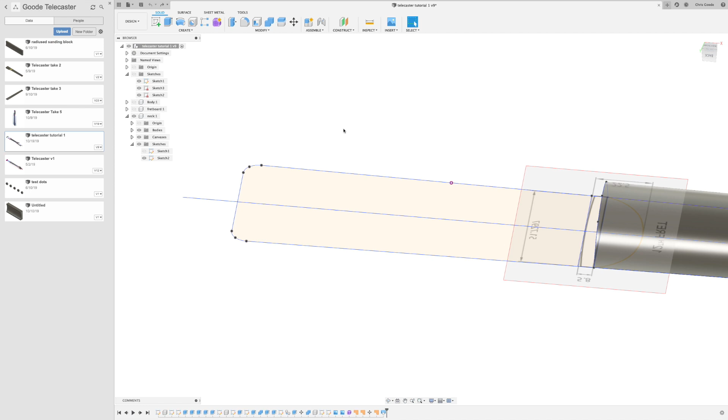Hi, Chris Goode here, and we've been working on this neck for a little while. Last time we lofted between these two neck profile samples that we grabbed a canvas of off a really cool website that makes custom necks. I really like the shape of this. If you want to try buying a neck from them, let me know how it goes, because if they look and feel like the ones I made from these profiles, I kind of like the way this neck plays. Really slim up in here, not really chunky, although sometimes that's desirable. It's just a slim profile neck that I like.

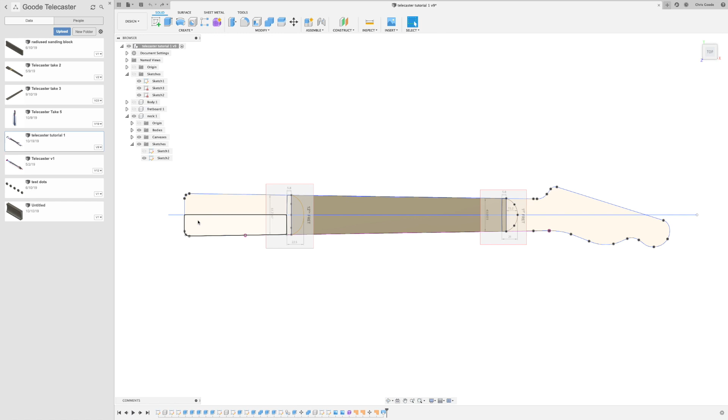Anywho, now we're going to work on the transition between this part of the neck and the heel, which is this part that we're going to extrude. In order to do that, we're going to have to edit this old sketch that we've got and get this in the right orientation. We're going to edit this part, so edit sketch. Great.

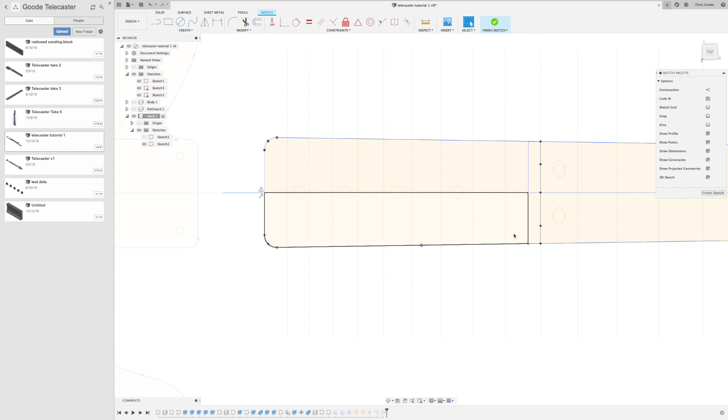Let me just show you where the frets are. The transition from that part I just showed you to the heel, which is where it bolts onto the body, is somewhere in between these two frets, the 15th and the 16th fret. So it's somewhere in here. So we were at 12. I'm going to go 13, 14, 15. Maybe where this dot is. There's nothing wrong with that. I think that would be fine.

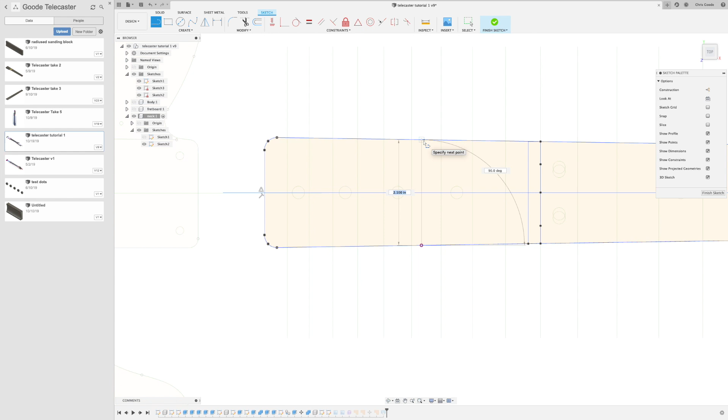So I'm going to grab a line and grab that dot, make it a 90-degree angle all the way up to this point, and then I'm done. That's it, we're done drawing the line. We can finish the sketch, then hide that other one, and make sure that we're in the neck component. So make sure you activate that component.

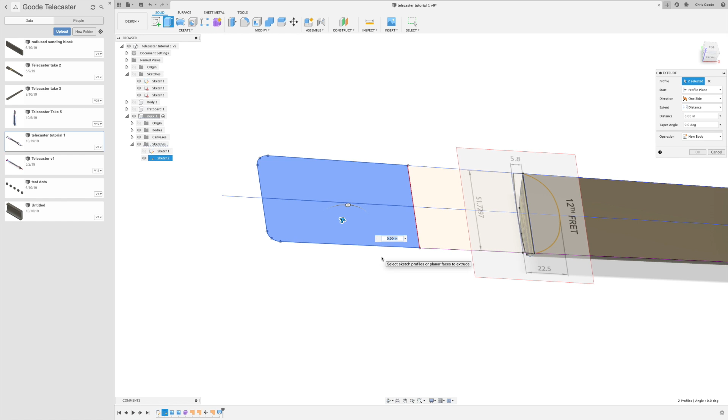And we're going to extrude this down 0.75 inches. So up is positive, and we want to go negative 0.75. There it is. And there we go.

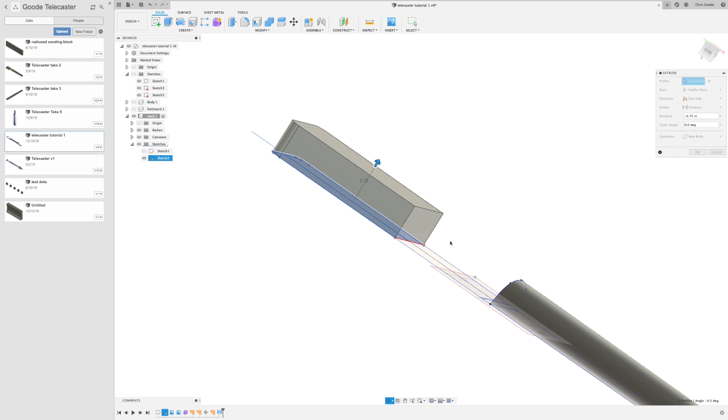I like it. So now the trick is that we're going to now work on the back side of it. Come here there. Okay, let's finish that body. That's good. Now we have one body here, an extra body.

Great, we're going to make a sketch that's on top of this one, so we're going to create a new sketch. And we're just going to make a little line coming out this way, sort of a little blunted triangle shape. We're going to do that by drawing a spline from here, connect it to the midline, and then connect it here.

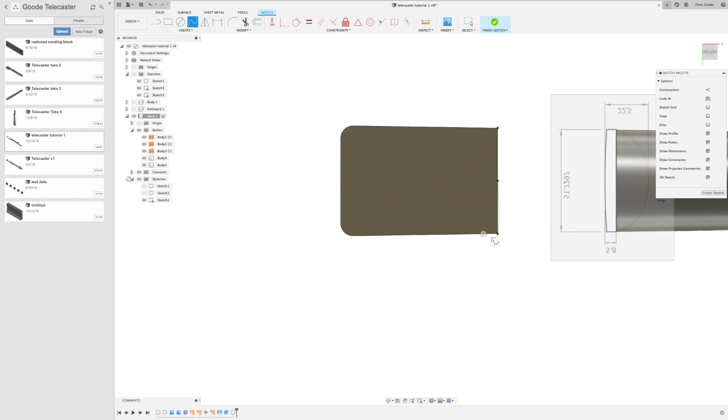And now's a good time for me to share with you where I'm getting this idea. Brad Anderson Jr., who I've mentioned before, has made a wonderful plugin for making fretboards and necks themselves in Fusion 360, is a member of Decatur Makers, and has made some beautiful guitars in the space. This is all cribbed from his video series on YouTube, and I'm happy to link to them in the notes below. I do like one or two things slightly differently, but for the most part, this is the method he's used to loft successfully.

Lofting, like I said earlier, is really tricky, but this is kind of a foolproof way that lets you loft when you do it right. And I'm going to try not to screw this up.

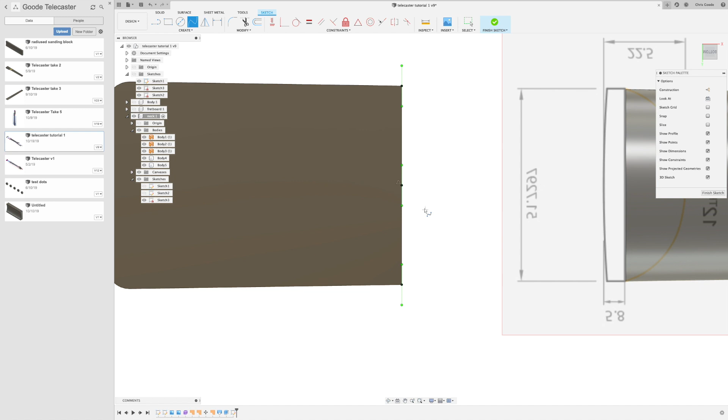When you made this spline, you'll see that you generated a couple of coincidents here. So there's this triangle, which means you're halfway, and then there's these coincidence with these other dots. These are okay for now, but the triangle I'm going to have to get rid of because I want to be able to move this point.

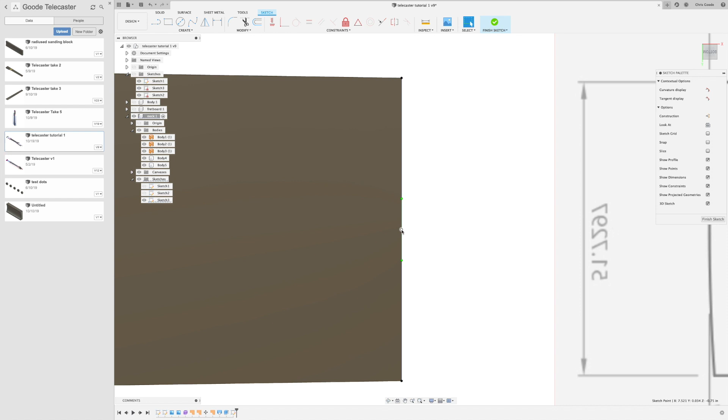So we're going to click on that, move copy, and we're just going to shift this out here to where? I don't know, let's see. Let's reveal where the frets are. I'm going to put it like kind of at the top of this circle right here. I don't know, try it out and see if it works for you. I think that's fine.

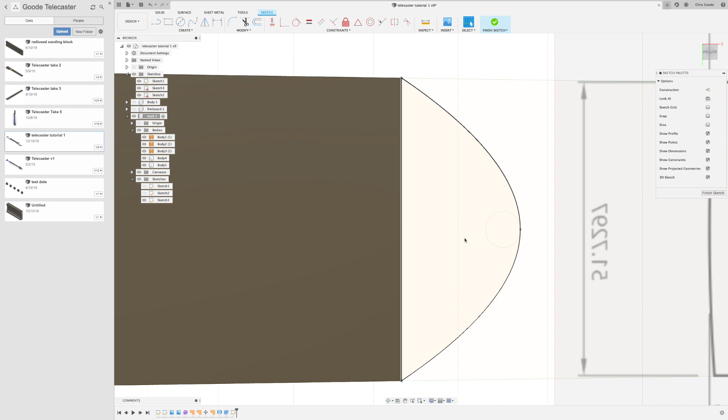All right, and now we want to make sure that this curve is coming straight out from this line, so we're going to make this align with that line. So now we get a coincident of the handle with the neckline, and that's fine. That's good, that's what we want.

I'm going to do the same thing to the other side. I grab that handle and stick it over here, so it's coincident with the line as well. And maybe we'll highlight this handle and make it equal in length to this handle. There we go. Now they're the same length and it looks nice.

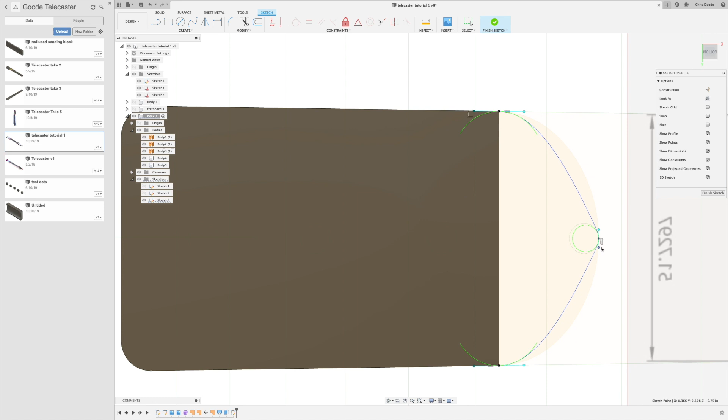This handle actually is screwed up, see? I'm going to make this one vertical first, so it's constrained, and then make it a little short. You see how that's getting nice and pointy out there? I want to leave it rounded a little bit, so it's this blunted triangle shape. That's pretty good, I like that. Okay, finish the sketch, and that looks good.

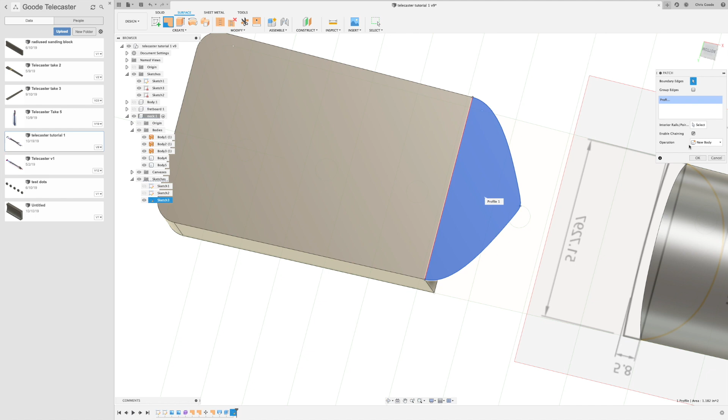We're not actually going to extrude this or anything, we're going to patch it in the surface area. So we'll patch that, and we get this profile. That's really going to help us when we're lofting from here to here.

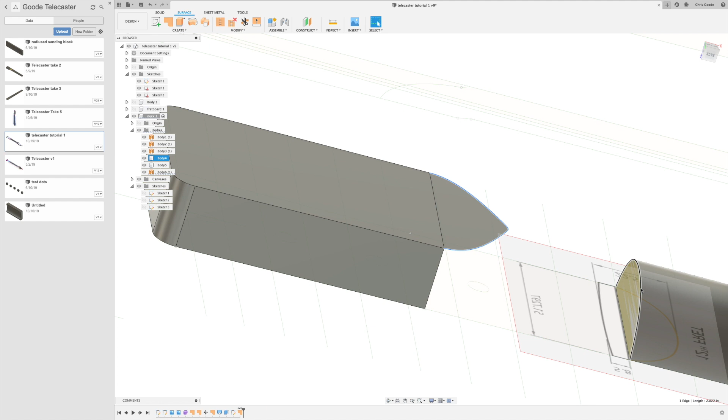We want to make sure that the piece that joins this part to this part and fills everything in between is gently sloping that way in a controlled manner. So we're going to let it follow some rails, and in order to make those rails, we're going to have to draw some lines. You don't have to draw hundreds of lines connecting these two points for the loft to follow, but it helps to have some lines gently sloping up from this spot down here, around this curve, around this radius, to this new blunted triangle we've made, which is going to be the transition to our heel.

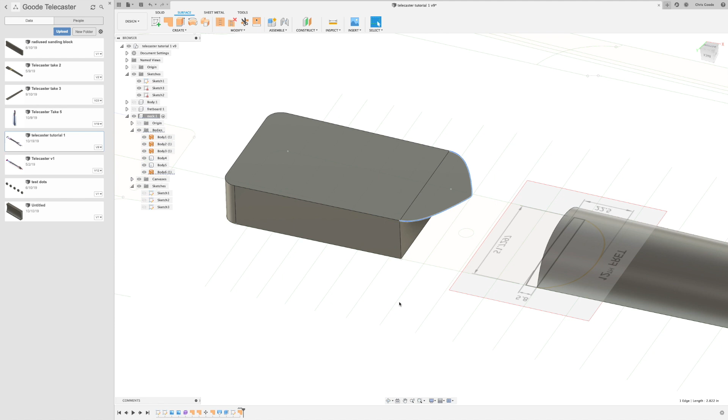So I'm going to make 6 lines, and it's no coincidence that this guitar is going to end up with 6 lines on it anyway, in the form of the guitar strings. They're going to hang over here, the nut.

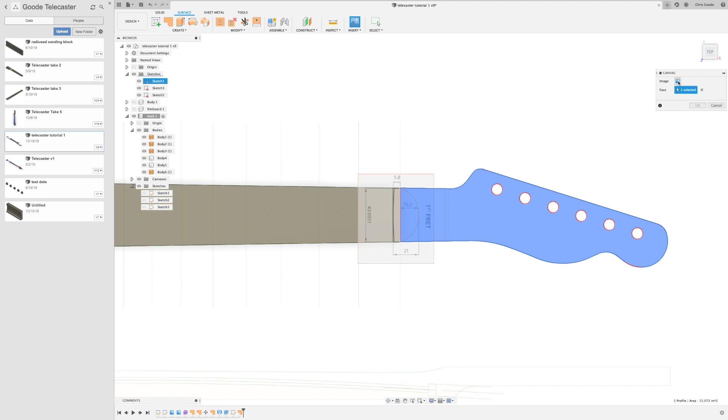So what I'm going to do to place the strings correctly is insert a canvas on this face, and find an image of a guitar nut. This is one I just grabbed off of Amazon. These nuts work just fine. Let me make that a little less opaque so I can see it better, and let's make it smaller. There we go, and drag that to where it's going to be.

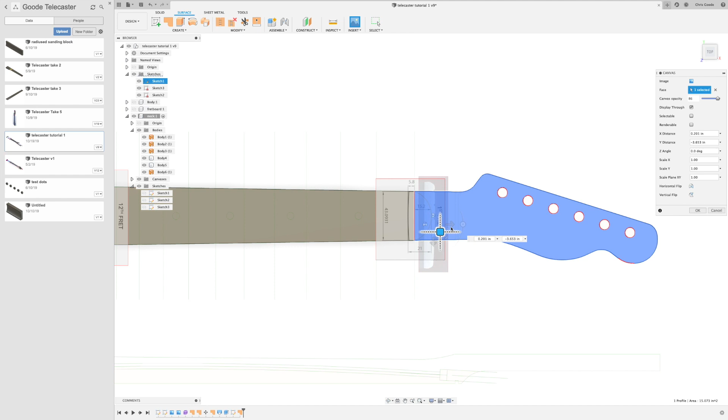I'll zoom in. It didn't have to fit exactly, but I do want the strings to go to the right place. Okay, I like that, that's good.

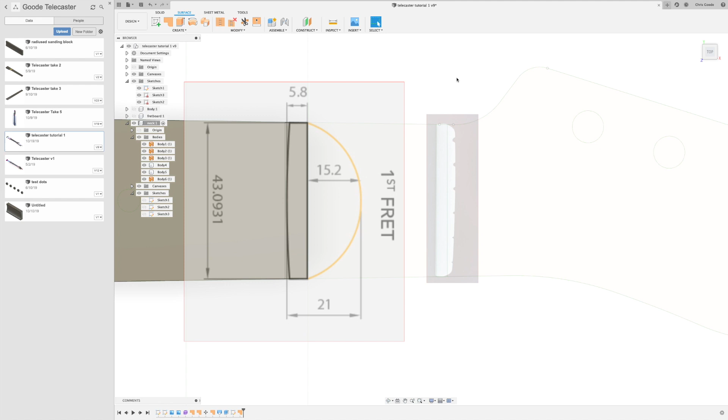So now we're going to draw a sketch again. You know what, let's edit the one we've already got. So let's take this one that we have and edit that. Well, no, you know what, we have to do a new sketch. It's okay, it's okay to do a new sketch.

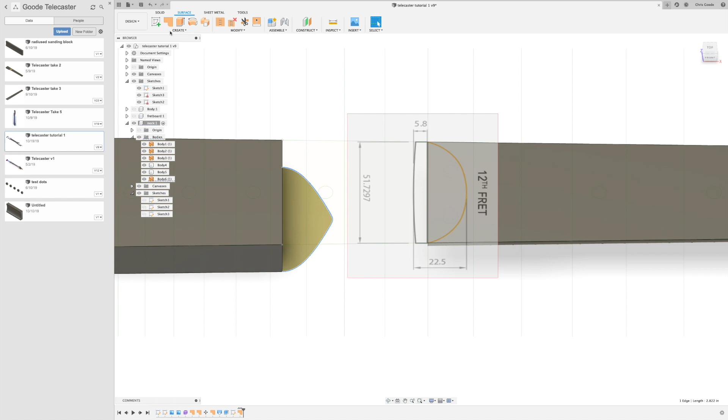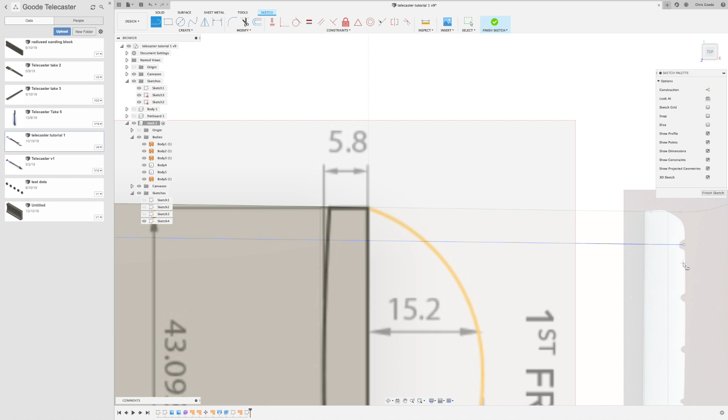And now we're doing it in this plane here, and we're going to join where the strings are going to go. They'll originate at the very center of these holes as they come out, and they'll terminate down here as they pass over the nut, the slots in the nut. I'll speed this up so you don't have to watch me do the rest of the strings.

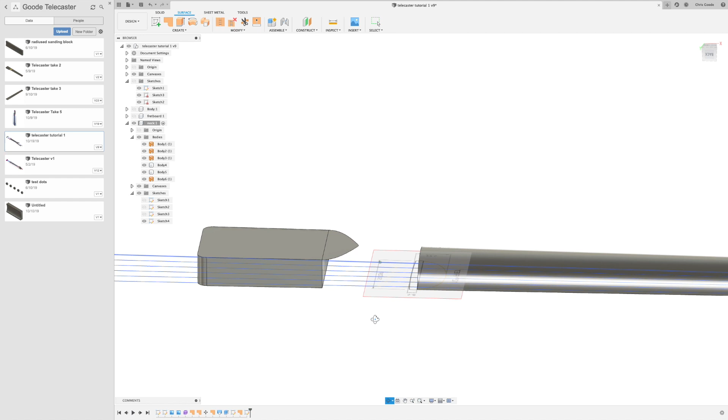Okay, so now we have these 6 lines, and let me show you what we're going to use them for. I'm going to hide those other sketches out there, and go back to this view right here.

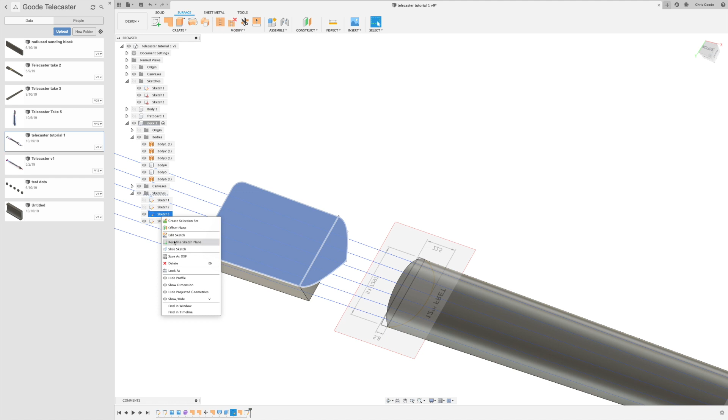I want to add just a couple more sketch components to the thing this belongs to. Remember, this is our sketch number, I'm not sure what number it was. Was it sketch number 4? No, sketch number 3. Let's edit that. Great.

Actually, I want to do some 3D edits. Let me reveal that sketch. I want splines that are going to go in a triangle from here to here. I know I already have one there. From here to here, and from this point down to this point.

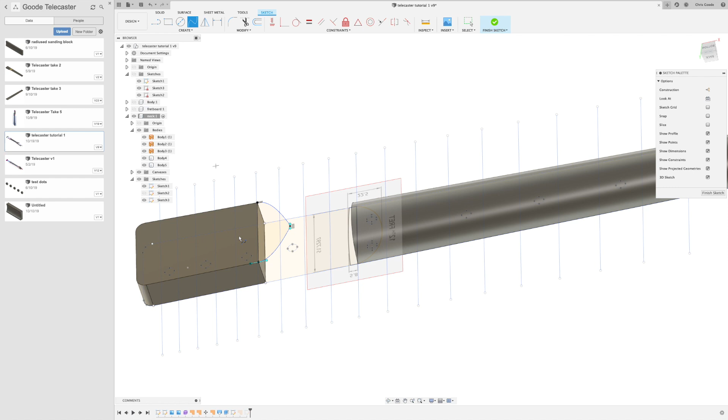So in order to do that, you need to make sure the 3D sketch is selected, because if you're going to connect, remember the plane of the sketch is here, the top of the heel, or the back of the heel. But I'm going to go out of the plane, so I'm going to go here, down to here. I can tell because I've selected that point.

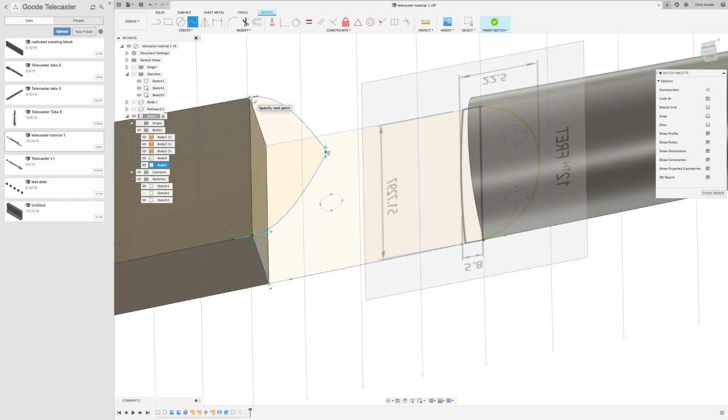One more spline is going to go between here and here. All right, I already have—actually, no, I don't. I need a spline between here and here. I'm going to do the other side as well. All right.

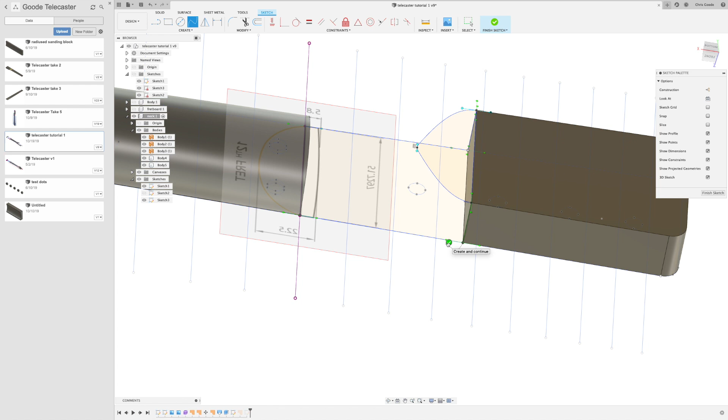And I should look that up myself, but surely there's a reasonable person out there who can help me.

Remember those splines we made before? We're going to do one more thing. I'll finish the sketch, but come back to this one for now. I'm going to project these onto a sketch that's curvy across the back of this thing, so I need a sketch for that. And here's the tricky part: those lines are in sketch 4, and I can't edit an earlier sketch and project to it. It's impossible, you can't do it. I'm not sure why, but it has to do with the timeline.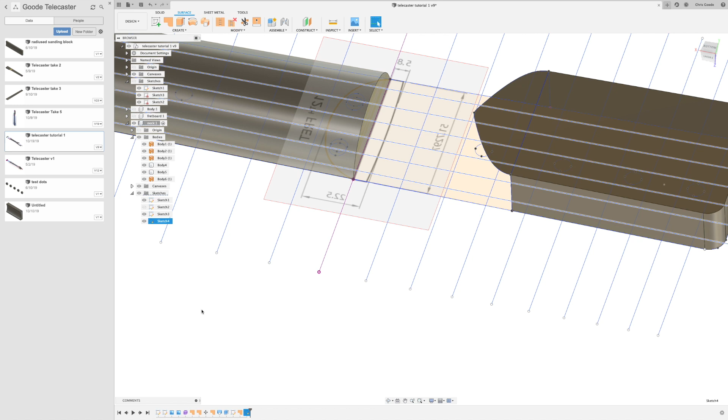What you can do is make a new sketch and then project those lines from sketch 4 onto it, even though that sketch might be in a different plane, and even if it's not in a uniform plane. I'll show you what I mean.

I'm going to create a new sketch. I know we're getting a lot of sketches here. This one's in the plane of the top of the nut, where it meets the body. See where we are now?

Now, while I'm in the sketch, I'm going to use Project Include, and this command called Project to Surface. Project to Surface lets you take other sketch elements and project them onto another surface, even a curved one, even if it curves out of the plane of the sketch you're editing.

So you have to be in a sketch that was created after the sketch you're going to grab geometry from to project. That's really the main rule. So, Project to Surface, and here's the dialog box.

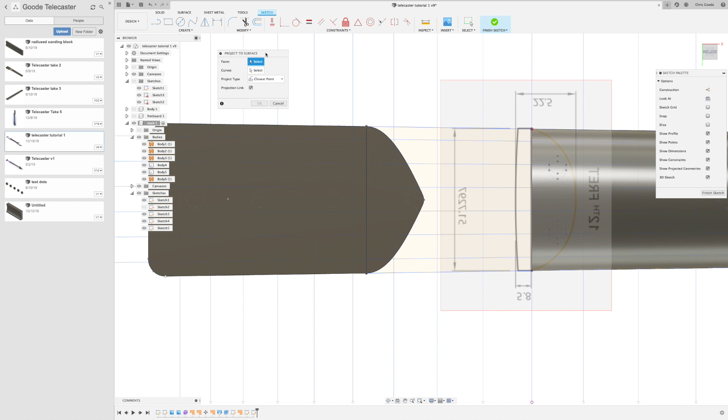The faces I'm going to use are this one and this face. So those two faces, even though they're not in the same plane, that's what I'm going to project these lines onto. I know they're lines, but it calls them curves.

So I'm going to grab these curves and project them onto the sketches. Here we go, 5, 6. Now you don't need projection link, so take that off.

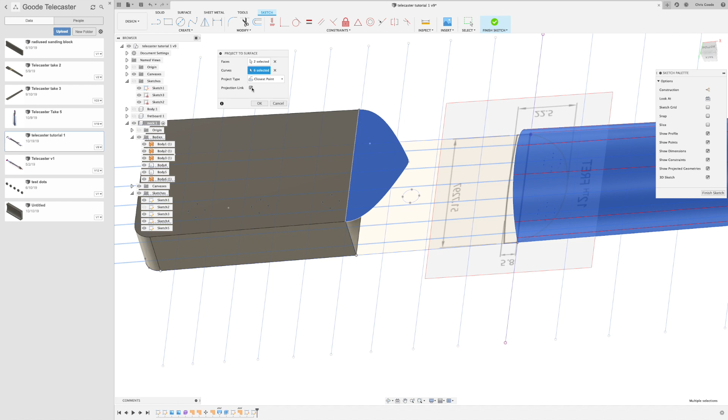Now we're going to do it along the vector, and we've got to select our vertical vector here, the z-axis, the blue z-axis. And there we go, along that direction.

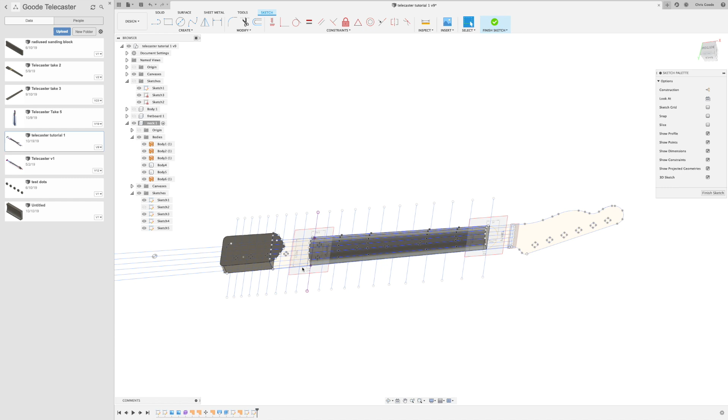You see how we get these little stripes there now? Click OK, and look - now we've got those curves on this curved surface. So handy.

All right, we're done with that sketch. We're going to go back to sketch 4 and edit sketch - of course, we can't do that - so we're going to be editing sketch 5 instead.

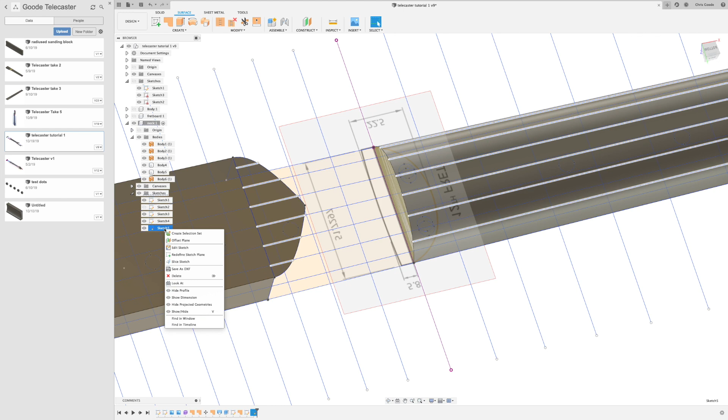We're going to edit this sketch we just made and connect these lines. I may have to draw actually new ones in those corners like I did before, but maybe not. Okay, so we're going to do that.

Draw a line here, check. From here to here, check. From here to here, check. You have to have 3D sketch on to do this. From here to here, that's line 5. And the last one, line 6 from here - let's make sure we're getting the right dot to here.

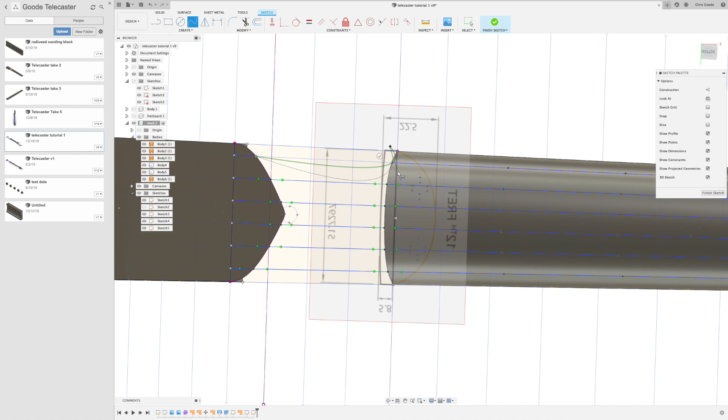Check. Nope, undo that last one. There we go. Nope, that one's not in the right place. Undo. Make that spline go right to that dot there. Check.

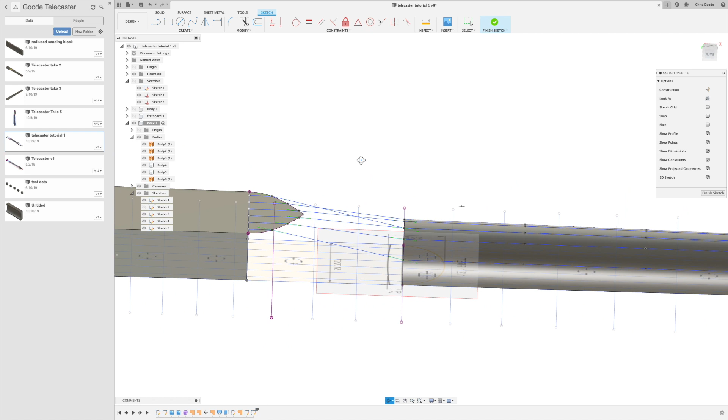Okay, that's good. Now, that's all well and good, but those are straight lines, and a guitar just doesn't look like that. It's actually a smooth transition, and the way we're going to smooth it out is to grab these lines and make them tangent to the string lines. You see how it just created that smooth surface right there?

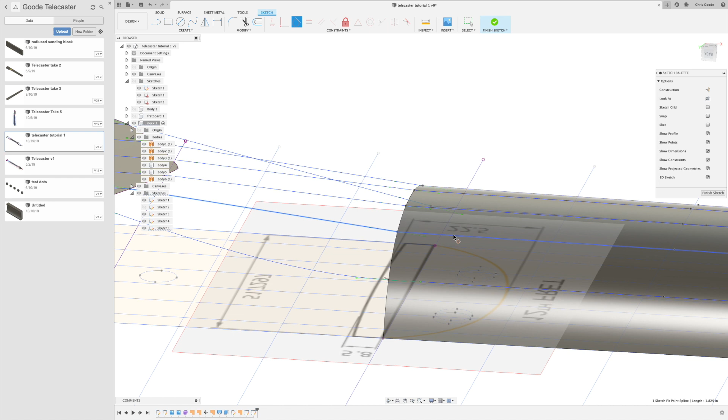Do the same thing for this line and this one. For this line to this one, to this one, and the last one from here to here.

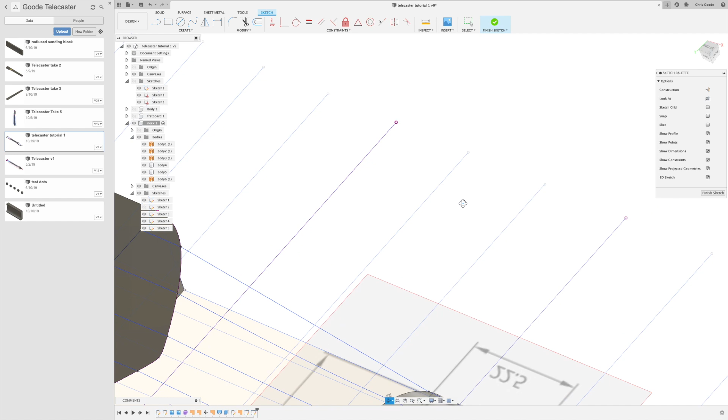Let's also do it for the line we made on the other side. Oh, there's one more, the sixth one. To there - great.

Beautiful. We're also going to grab a spline, connect these two points, and make this thing tangent to here.

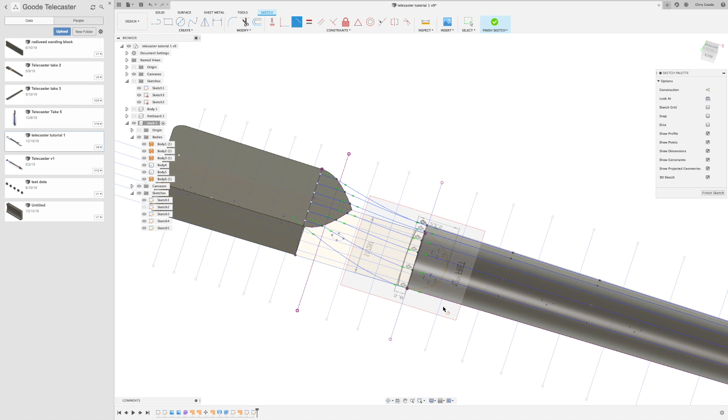Nice, and there's one more on the other side. Thank you for rotating about not where I'm clicking my mouse, Fusion - I appreciate it.

One more spline right here to there, and this one is tangent to here. I know I already drew these splines here, but I probably wasn't in the same sketch, and I want to have these things all in the same sketch so I can make nice surfaces on them.

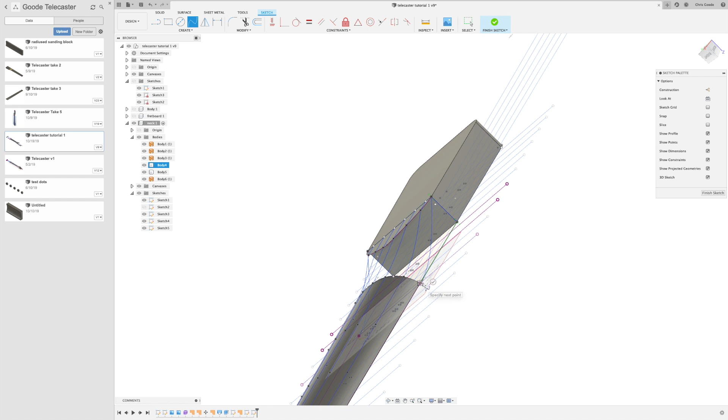Make sure all these things are connected to each other. Also, I'm going to connect these two points with a spline.

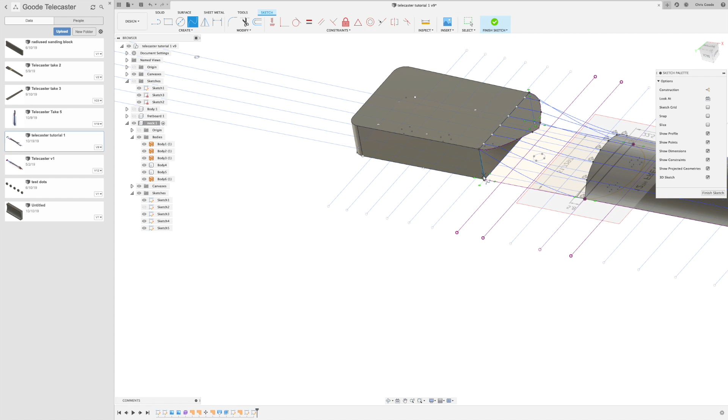These two points with the spline, and the last bit is these guys. Okay, if I did everything right, and I do hope that I did, we can finish this sketch.

I'm going to hide sketch 4 with all those lines in it, and sketch 1 with all of the fret stuff in it, just so I can get a little bit better view here. And I'm going to create a loft.

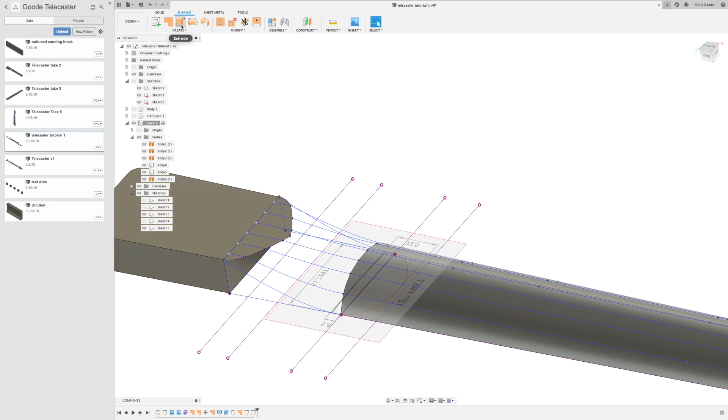I'm going to grab this line and connect it to this one, and connect that one to the third one. Just connect the spline lines now, make sure you're doing the splines. There, there, there, and this last bit right there.

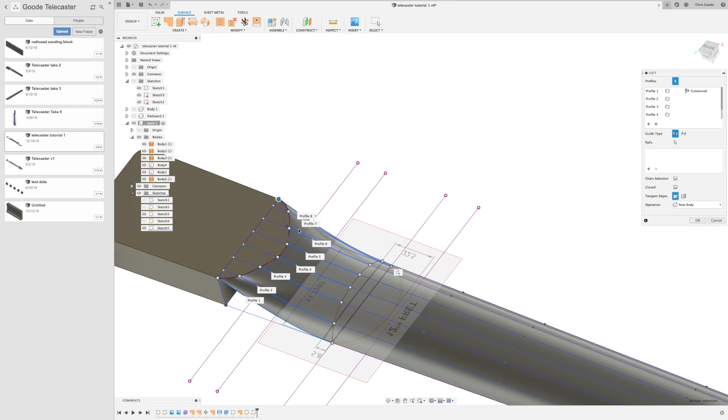Now you notice there's like little gaps in here. You can see them if you're zooming in, and that's bad. It won't seal up the surface correctly if you're doing that.

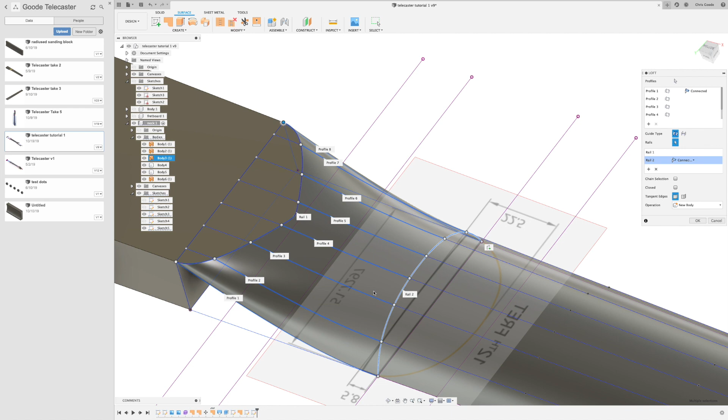So we're going to add rails, and we're going to say that line that we made is a rail, and this line back here that defines this thing is also a rail, and that's going to seal everything up. And that's a beautiful loft right there.

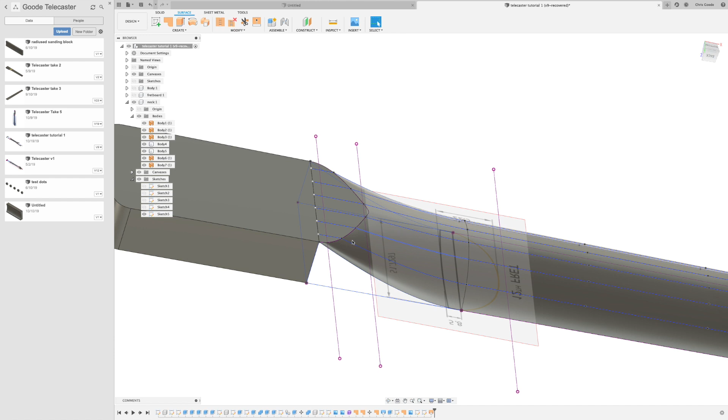We were just admiring this lovely loft that we've made, creating this smooth transition from the neck into the heel, and we've got to close this up and make this a body so that we can join the body we've created down here in the heel with this neck section, and join that transition all into one big thing.

So we're going to need to patch these open areas that we have here, and in order to do that, I'm going to edit this sketch a little bit more where I've done these loft anchor points. I'm going to hide the canvases just to give me a little bit better view, and I'm going to edit the sketch.

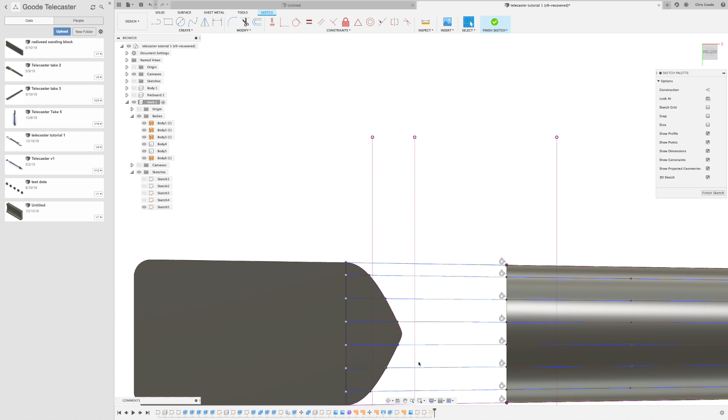Now the loft's going to go away because the sketch was done before the loft, and I just want to add a couple of things. You see how these are all sort of open spaces right here, which means that you can't patch them. So I want to make this big rectangle under here patchable.

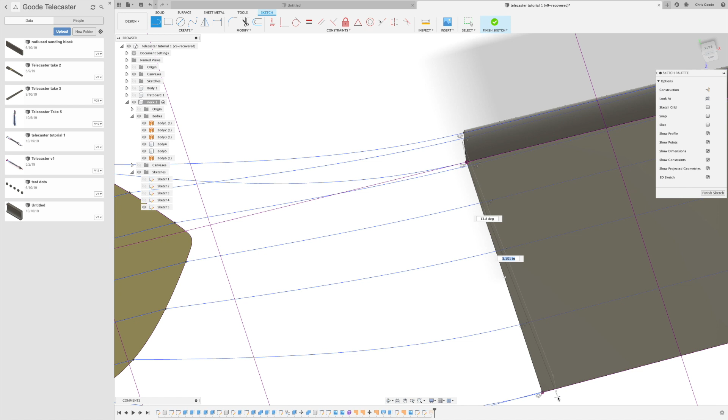So I'm going to connect this line over here with this one, and you'll notice I want to make sure that I'm coming down to that corner. I also want to do that corner to here, and then I want to do this corner to here as well.

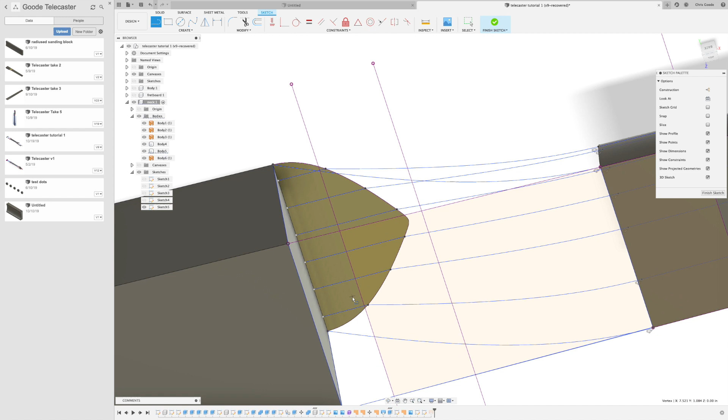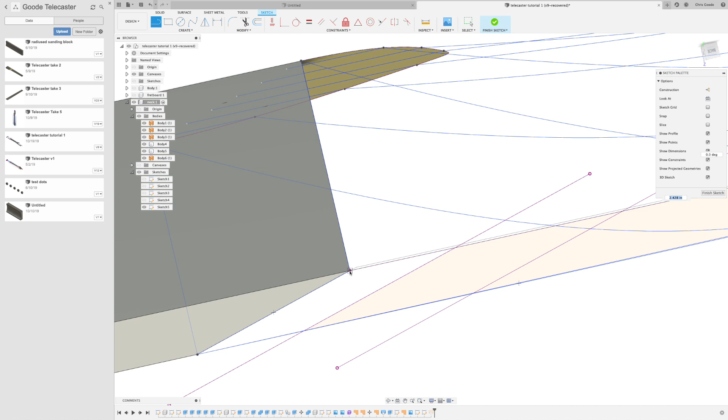And I don't know why I can't do this last one. I'm not sure why. Let's make sure that we're in the right space. Yeah, that's good. This one has got to go over here. There it is. Okay, now you can see that the entire thing is patchable because it's highlighted like that.

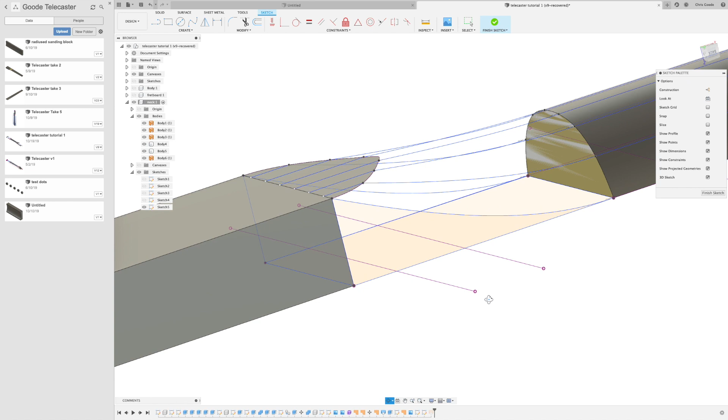We want to do the same thing with these sort of triangle sections on the end. I'm going to make sure that this is up over here. All right, and we just got that triangle. Let's switch it around, and get this one down to here. And we've got that triangle.

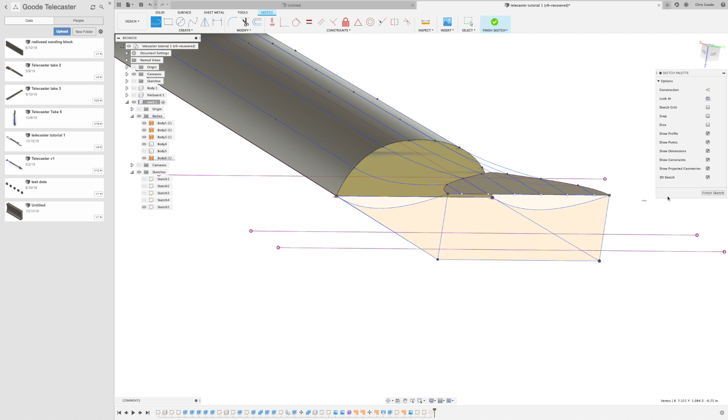Last thing, let me hide this body number 5. I want to be able to close off this part as well. All right, so now, yeah, that's everything. Let's finish the sketch, and then we'll start patching in the surface area.

So we're going to patch this rectangle, I'm going to patch this one on the bottom. We're actually going to add all these together, and we're going to patch the side ones.

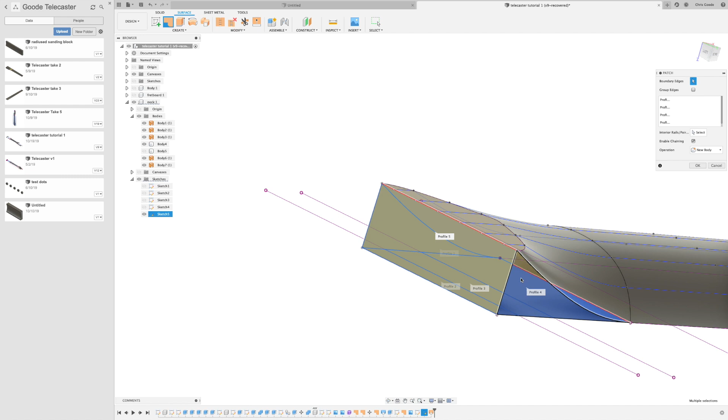And then we're going to start stitching these patches together. I want to take the beautiful loft that we made and stitch that with the blunted triangle, stitch that with the part where it joins the rest of the heel. Get our triangles in there as well, and the bottom part too.

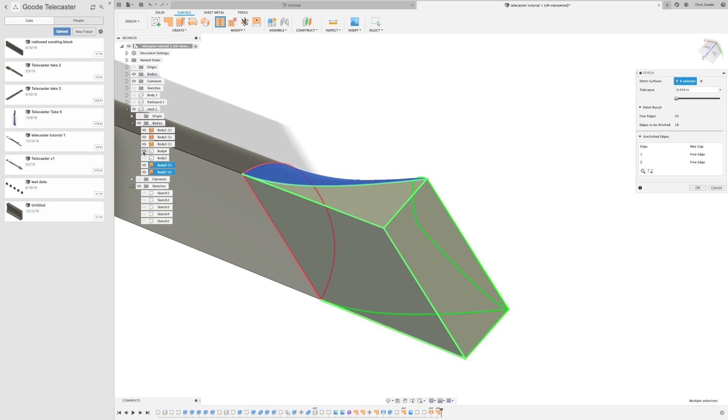Great, and the last thing to go is I'm actually going to hide that neck itself. I'm going to patch this last one in there. Okay, see how we got green lines all the way around? That means all of those edges are now going to get stitched together into a new body.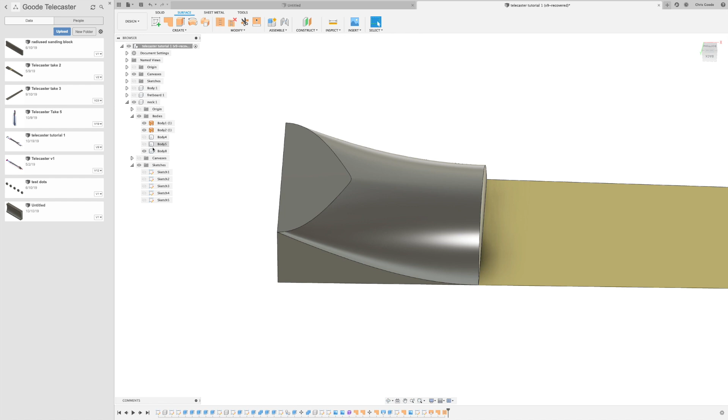And when we click OK, look at that. We've got body number 8. It's solid. It changed from this open surface to a solid body along with our heel and the rest of the neck.

In the next video, we're going to add the headstock, and we're going to work on the transition between this part of the neck and the headstock, and then we'll be done designing the neck. We can go on and design the tool paths for cutting the whole thing out. We'll see you in that next video.